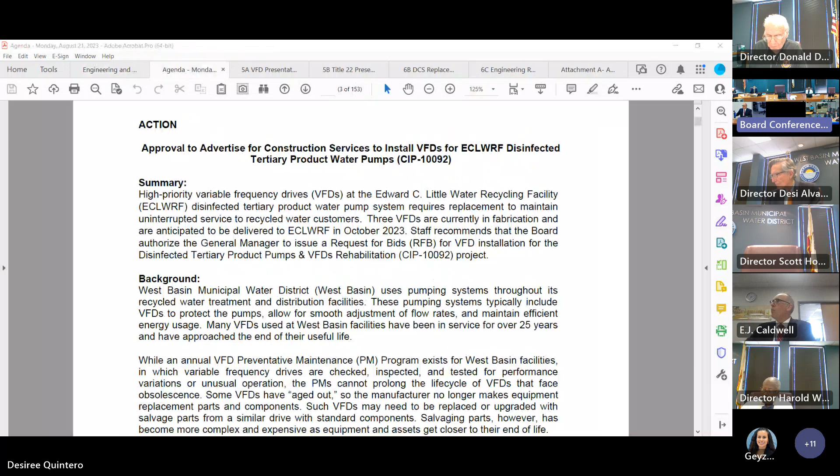Thank you, EJ. Good afternoon, Chairman and members of the board. If you could please turn to page 6 of your agenda packet, and we'll start with a project overview on the VFD and water pump replacement project. I'm on slide number 7.

First, a little background on the variable frequency drives, VFDs, as we call them. They are controlled by changing the speed of the pump or the motor, so that you can have best efficiency in running the system. It allows for fine tuning of the speed control, protecting equipment, and reduced power consumption. It provides efficiency across a series of pumps. We have a total of 120 VFDs and pumps throughout the system.

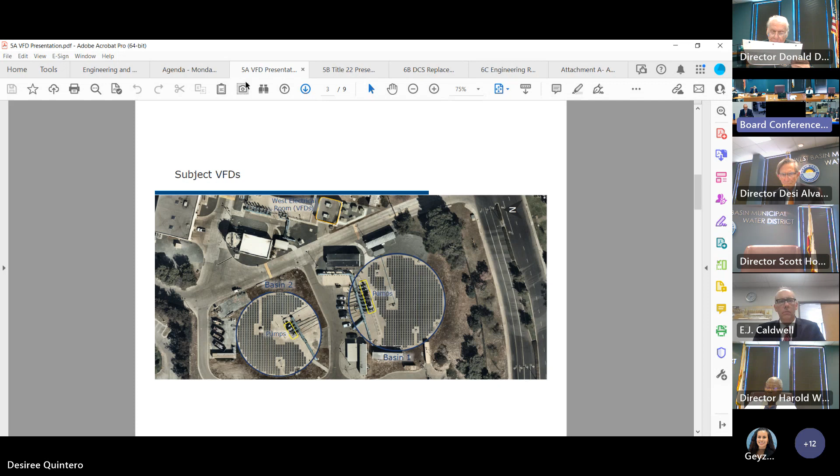We're going to be talking about the product water VFDs for the Title 22. Essentially we have 6 total VFDs. If we move to the next page, on page 8, this will tell you the location of the VFDs we're talking about, and then move to page 9, and we'll give you a little bit of the current state of the VFDs.

This project will eventually replace a total of 6 VFDs. We have about 10 VFDs that are top priority from our operators and operation. Of these VFDs that control the product water pumps, there are 3 that are out of commission, made out of commission because there are no more available parts to service the VFDs.

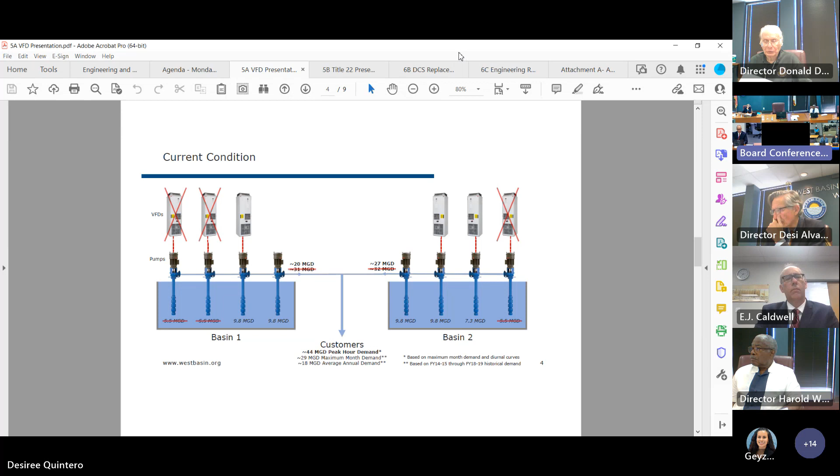We first started this project, and it was brought to your attention in May of 2021. At that time, we awarded a contract to a consultant engineering firm to design the replacement for the VFDs. Then in May of 2022, we procured the VFDs, and they are expected to be delivered shortly in October or late September. Next page, please.

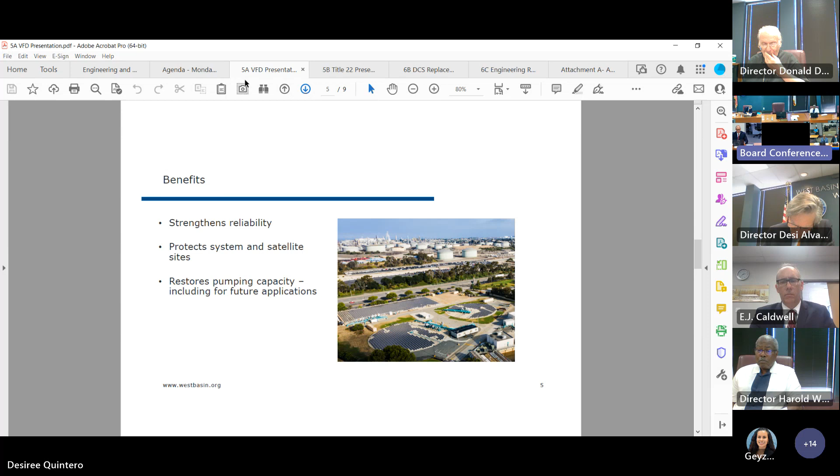The overall benefits of this project are to strengthen reliability, protect the systems and the satellite sites, and to restore pumping capacity to include for future application. Next slide, please. We'll go over the overall schedule.

Last May, we awarded the fabrication. It was expected to take about 42 weeks to fabricate the VFDs. We had a preliminary submittal in August of 2022, and our final shop drawings were February of 2023. We're asking at this particular junction to authorize advertising for the construction contractor to actually install the VFDs, as well as to proceed forward with the construction management firm that would manage the construction on the project.

Again, the expected VFD deliveries are in October of 2023, and we'd like to be able to award the construction service contract in November of 2023, with the project being commissioned early 2024. Question. Yes, you may. Where are these VFDs constructed?

These VFDs were initially constructed in Finland, and then they were finished here in the United States. So partially assembled in Finland, and the remaining assembly was done here in the United States. And the new ones are going to be the same system? Yes, they're all identical.

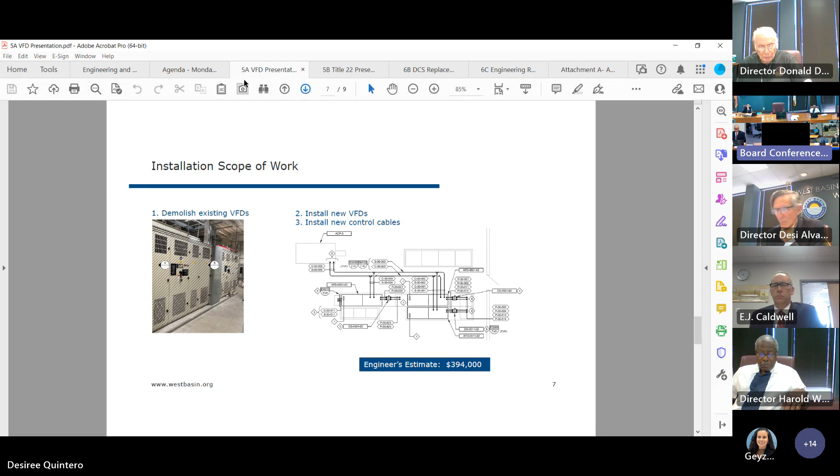A recap of the overall budget for the VFD replacement project. The total contract award for the design consultant was about $225,000. We've spent about 70% of that, or $157,000. The fabrication was done by Wesco for a total price of $590,456.

We've spent about 21% of that to date, or $125,553. The estimated total cost of installation is going to be $394,000, and the estimated construction services for construction management of the project is estimated to be a little south of $150,000.

Okay, at this time I'll take any questions and read the recommendation. Is there any additional questions? I don't have any. Williams, do you have any questions? No. You don't have any additional questions? Has Director Gray joined us?

I have a couple of questions. First one is, what's the estimated construction cost of this item? In other words, we would be putting it out to bid. The estimated construction value is $394,000 for the installation, correct?

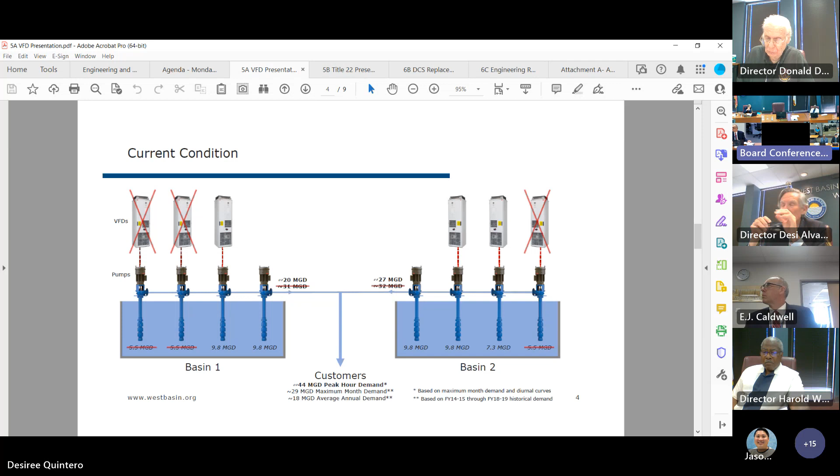On packet page 9, we're showing that the peak hour demand is 44 MGD. Just curious, how often do we encounter that peak hour demand? Maybe I can give it a shot. Director, I'm not sure if we have the number of how many days we encounter that, but it'll probably depend on several factors. Mostly it's the hottest day of the hottest month of the year.

I understand, we don't have an answer for you. Okay, so you don't have an answer. It may be once a year, it may be 10 times a year. It could be once, it could be 10 times. It'd be interesting to know how many times. We'll look into that, yeah, and get that answer for you. Okay.

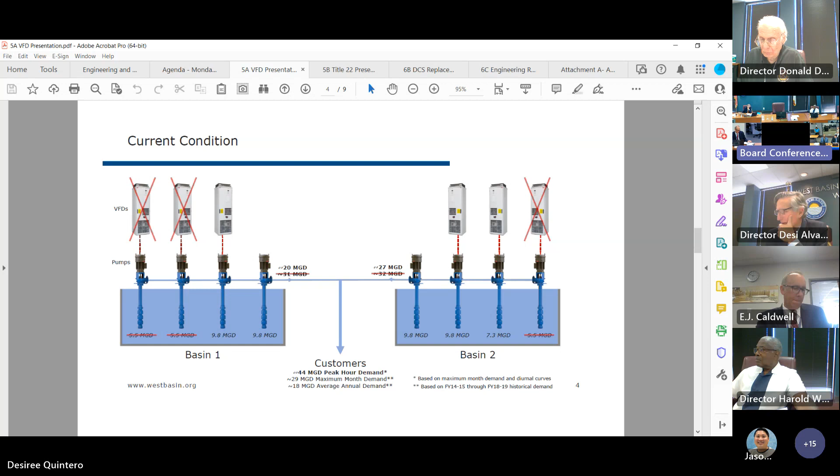At this time I'd like to read the recommendation. Staff recommends that the board authorize the general manager to issue a request for bids for VFD installation for the disinfected tertiary product pumps and VFD rehabilitation project, CIP number 10092. Thank you.

Director Williams, would you like to support that recommendation? I would recommend that it goes forward to the board. We'll move this one forward to the board.

I would like staff to revisit the repair and replacement contract that we just recently awarded, and maybe, if it requires bringing it back to this committee and the board, please do so, expanding some of the items that I think would be, such as this one, that would be realistically part of such a contract.

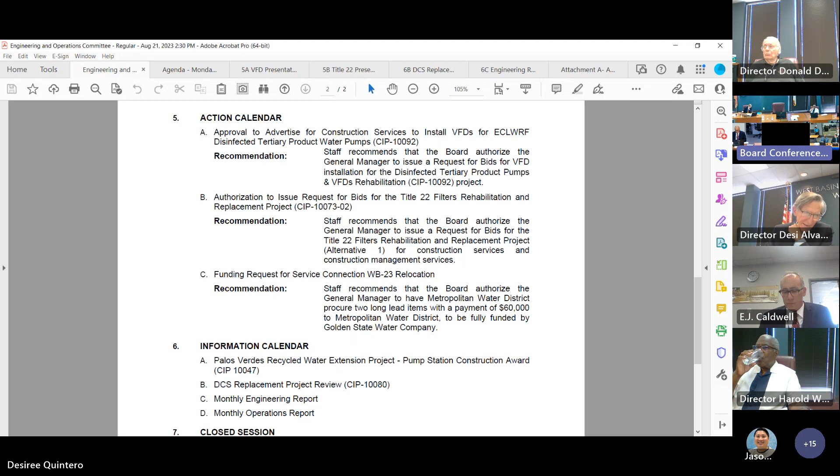Okay, we'll move on to the next item on the action calendar. And that's item 5B, and it's the authorization to issue requests for bids for the Title 22 filter rehab and replacement project. Mr. General Manager, would you like to introduce that item?

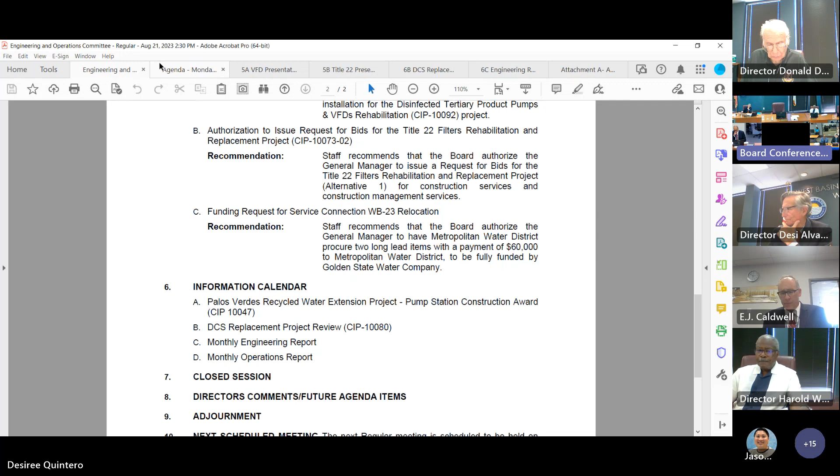Happy to do so. This next item begins on packet page 37. And for this presentation we have Orlando Rodriguez, our senior engineer. Thank you, EJ, and good afternoon Chairman Alvarez and members of the committee. As EJ stated, the staff report is on page 37, but at this time I'd like you to please turn to page 44 of the agenda packet for the presentation itself.

So first, here's the agenda for today's presentation. It's a little bit lengthy, so please bear with me. First we'll start with the process overview at the Edward C. Little facility, followed by the Title 22 filters R&R project itself, some background information and so forth. Following that is a financial analysis of the project. I'm discussing several alternatives that we'd like to present today, as well as some next steps.

Next slide please. One more. Perfect. Here you could see an aerial of the Edward C. Little facility.

Just want to do a quick overview of the Title 22 process itself. So on the northeast corner of the facility, water comes in, secondary effluent comes in from Hyperion via pump station and a force main. That then enters the pretreatment high-rate clarifiers, kind of in the south middle of the facility, and then effluent from there goes into our filters. Just adjacent to that you'll see filters 1 through 10, essentially labeled as train 1, and north of that, crossing the road, is the converted filters, train 2, which are filters 11 through 14. Effluent from the filters going to our chlorine contact basin, and then followed by the product water tanks, which then get pumped into our distribution system, sent to our satellite plants at source water, along with our irrigation customers.

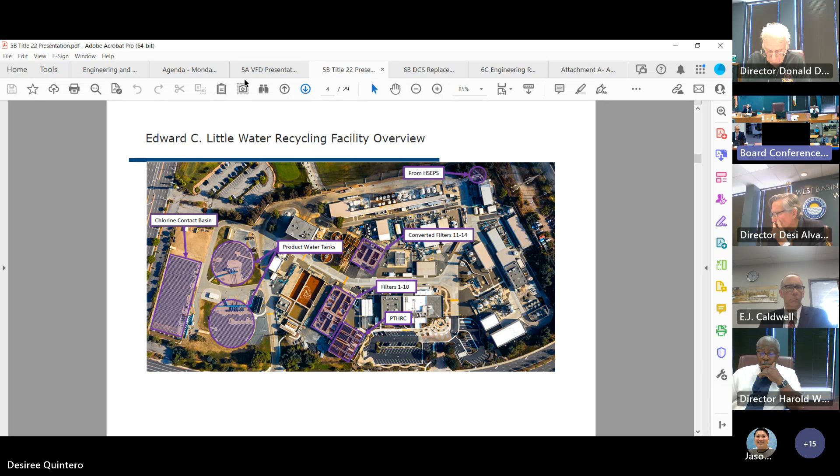Just some background on the filters themselves. In 1995, as part of the phase 1 construction of the Edward C. Little facility, filters 1 through 6 were constructed for the purpose of producing disinfected tertiary water, also known as Title 22 water, along with filters 11 through 14, which at the time served as pre-treatment for the production of advanced treated water for the West Coast barrier.

Then in 1997, as part of the phase 2 expansion, filters 7 through 10 were constructed and basically added on to the existing filter structure of filters 1 through 6 for additional disinfected treatment capacity. And then in 2007, as part of the phase 4 expansion, filters 11 through 14 were converted for even more treatment capacity for the production of disinfected tertiary water. Next slide.

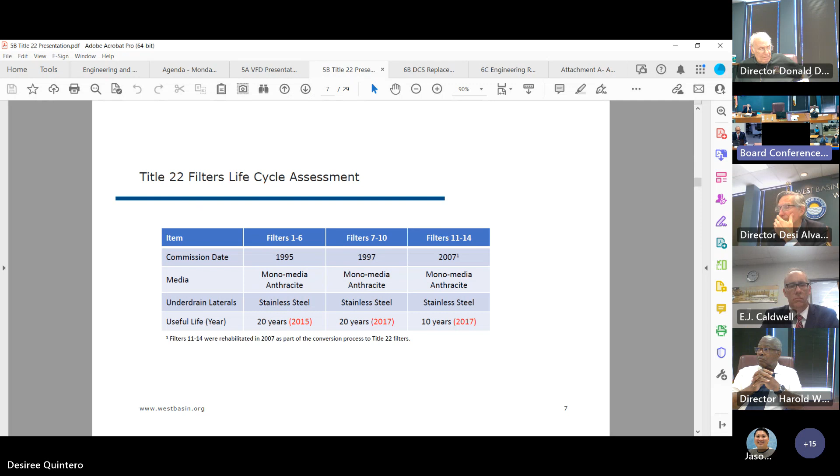So one thing I want to highlight here is a key component of the filters themselves are the underdrain laterals that help optimize performance while providing uniform distribution during the backwash cycle of the filters. These laterals typically have a useful life of 20 years.

So if you see at the bottom of that table there, I have some information in red essentially showing the end of the useful life, for instance, for filters 1 through 6, that would have been in 2015, filters 7 through 10 in 2017, as well as filters 11 through 14, 2017. So these underdrains have been operating beyond their end of useful life for about 6 to 8 years.

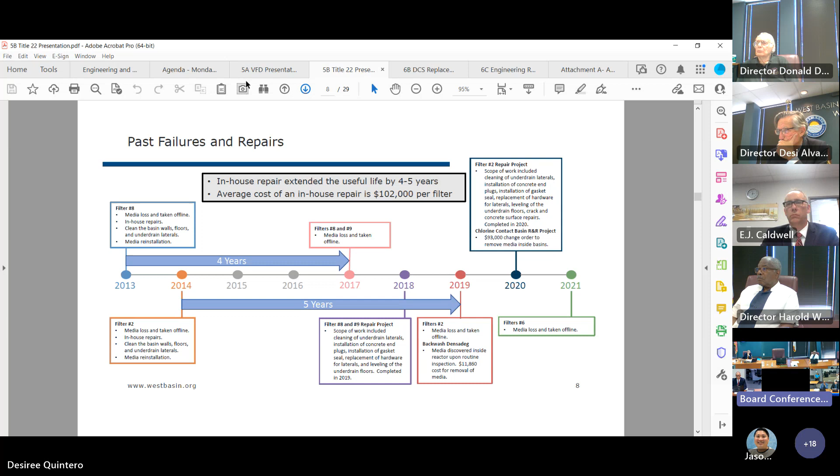So in the end, these kind of spot repairs that we performed, as you could see, only really extended the useful life of the filters for about 4 to 5 years until they failed again. And the average cost to bring those filters back online was about $102,000. Next slide, please.

So due to the repeated failures of filters 2, 8, and 9, it was decided to undertake a more comprehensive R&R for the remaining 11 filters themselves. In 2020, an RFP for design services was initiated, and after a thorough evaluation process, the project was awarded to Carollo Engineers. The scope of services included an evaluation of R&R alternatives, drawings, specifications, and at the end, a construction bid package that we could put out for the installation of new elements, filters, and so forth.

During the design phase, 4 technical memorandums were completed, and a recommended scope of work was developed to replace the under-drain laterals, perform concrete repairs, and construct necessary safety improvements. The construction bid package was completed in June of last year, 2022. Next slide, please.

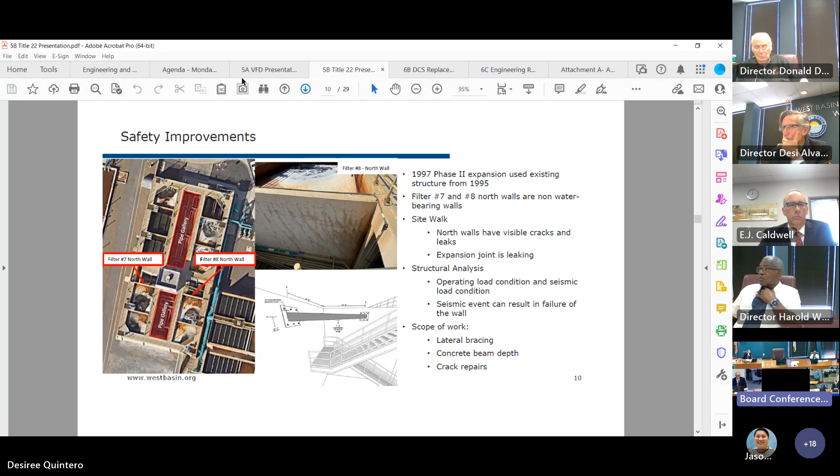Carollo performed the structural analysis, technical memorandum number 2, which indicates that a seismic event can result in a failure of that wall. As part of the project, staff still recommends to move forward with the safety improvements in the form of structural lateral bracing, crack repairs, and added concrete beam depth that will increase the load capacity of those walls. Next slide, please.

And I do want to go over the crack repairs because that was initially asked for staff to move forward with. So as a result of the structural analysis, staff was authorized to issue a request for bids for the safety improvements in late 2022. Bids were due on January 18 of this year, and one bid was received for $150,000 to perform all the safety improvements. Staff presented that to the committee, but it was voted at the time to not proceed and implement the crack repairs only.

We tried to negotiate with the one contractor, the one bid that we received, to just perform the crack repairs, but unfortunately they declined to move forward with just that scope of work. So we then proceeded with trying to find some local contractors that specialize in crack repairs and concrete work.

At the time, there was no interest from some of the local contractors that we reached out to. So we then decided to go out to solicitation again and issue a request for bids for the crack repairs only. That was initiated in June of this year. Bids were due in July, last month, and unfortunately we did not receive any bids for the crack repairs only.

We reached out to local contractors again to see if anybody was interested. We received one contractor that was interested, and we performed a site visit with them on August 12th, last week, and we received a bid for $84,000 for the crack repairs only. So I do want to point out that the larger overall project does have the crack repair safety improvements included in it, but we do have options if we want to just perform the crack repairs only and move forward with that. Question? Yes, you may.

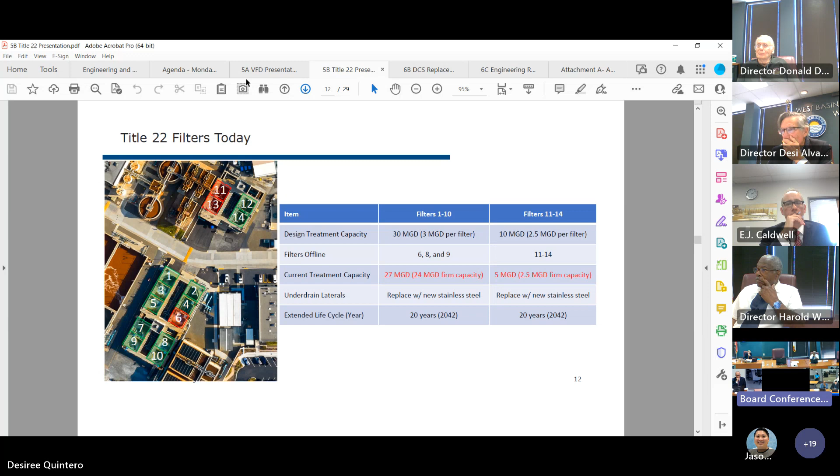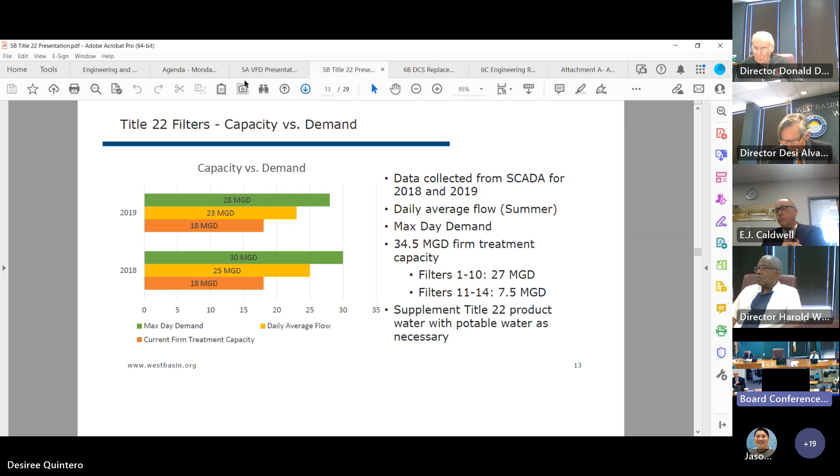So as part of a data gathering exercise, data was collected from SCADA for 2018 and 2019. The highest daily average flow was 25 MGD in 2018 and 23 MGD in 2019. Also, the max day demand was 30 MGD in 2018 and 28 MGD in 2019. So as you can see, with our current firm treatment capacity, we are not able to meet the demands using Title 22 water as a source water. What that means is that we have to supplement, and we supplement with potable water when that happens. Next slide, please. One more.

Perfect. As previously mentioned, the Title 22 water is the source water for the satellite plants. Title 22 water enters the satellite plants and is refined further to produce either nitrified or boiler feed water for the particular refinery. Typically when the product water demand is greater than the Title 22 source water coming in, potable water supplement is used as makeup water to meet these demands. But unfortunately, this comes at a high cost to West Basin because we're essentially paying the rate of the local purveyor when we supplement with potable water.

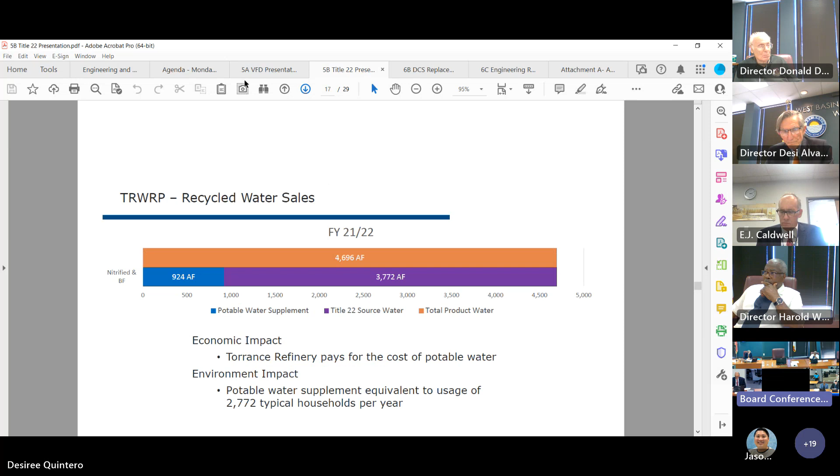And this is Torrance, but there's a unique situation here where the refinery pays for the potable water supplement when needed, as they own the potable water meters. So although there might not be an economic impact to West Basin, there's still an environmental one. That results in about 2,772 typical households per year. Next slide, please.

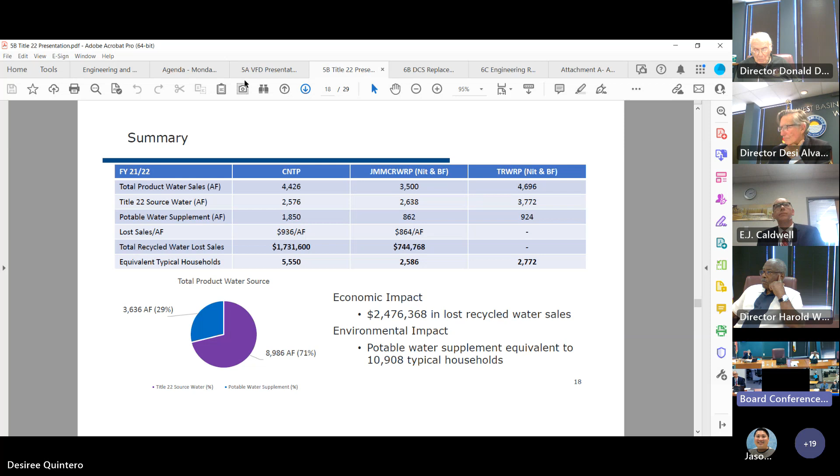So in summary, the potable water supplement accounted for almost 1/3 of the product water source used to produce either nitrified or boiler feed water. This resulted in a total of about $2.4 million in lost recycled water sales, along with the equivalent of almost 11,000 typical household usage for fiscal year 21-22. Next slide, please.

So for consideration purposes, staff is proposing 3 alternatives to move forward with this project. Alternative 1 would perform a comprehensive R&R on the 11 remaining filters with no prior repairs. We already did some repairs on filters 2, 8, and 9. As previously shown, the filters are beginning to fail, and this alternative will limit the probability of any major future repairs while increasing reliability and customer service by avoiding increased service interruptions.

Alternative 2 would perform a comprehensive R&R on just the 3 offline filters, 6, 11, and 13, and take a wait and see approach by performing spot repairs or an R&R on a filter once it fails. So just doing the R&R on 3, and then the rest, the 8 remaining filters, rehabbing them as they fail. That alternative takes a more reactive approach, as it presents a higher risk of potential customer interruptions and compliance due to the likely failure of those 8 remaining filters.

And last but not least, alternative 3 would allow for an R&R for up to 2 filters a year. We would program the project each year, and therefore it would take approximately 6 years to complete the 11 remaining filters.

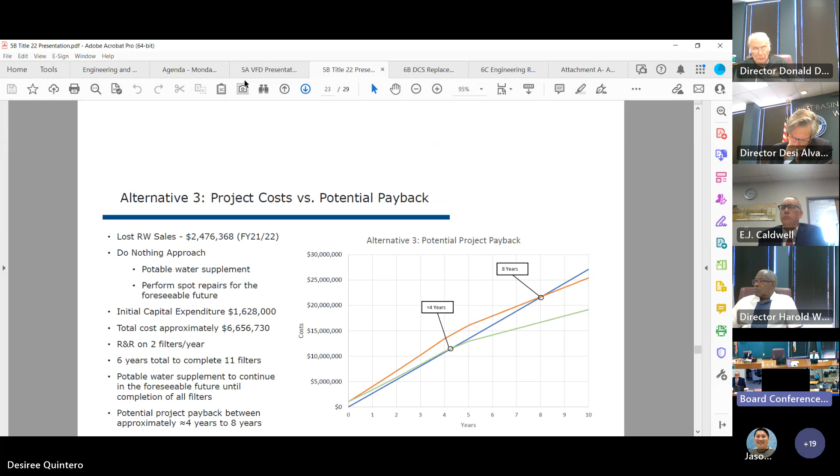And similar to alternative 2, we believe that with alternative 3 we're likely not going to be able to achieve a 75% reduction, more in line with 25 to 50%. So in this case, for alternative 3, we can expect a return on investment on the total cost of this alternative somewhere between 4.

So here, going over each alternative and some of the key factors, and based on the information presented before, staff is recommending that we implement alternative one. As previously stated, it has the lowest total cost overall of the project, increases the reliability of all filters at once, decreases future customer interruptions, and limits the possibility of any future repairs on the filters themselves moving forward. Next slide, please.

So here are next steps and a preliminary project schedule. Obviously, we are meeting today to get authorization for action to request bids. Solicitation would begin next month, in September of 2023. And hopefully we would award the project in November of this year, 2023. The estimated construction timeline is about 12 months, so that would put us into November of next year, 2024, for completion.

Next slide, please. So here is a recap of the estimated project expenditures if we were to move forward with alternative one. In terms of previously planned project expenditures, we previously anticipated about 5.2 million in last fiscal year and just over $2,000 in this fiscal year, but things have changed. So right now, we have revised capital expenditures and are currently anticipating a spend of about $4.2 million for this fiscal year and almost $800,000 for next fiscal year.

Partial external funding in the amount of $468,000 has been secured through fixed payments from our refineries. The difference, about 4.6 million, would have to come from our pay-go and funds from our reserves to complete the total spend for the project.

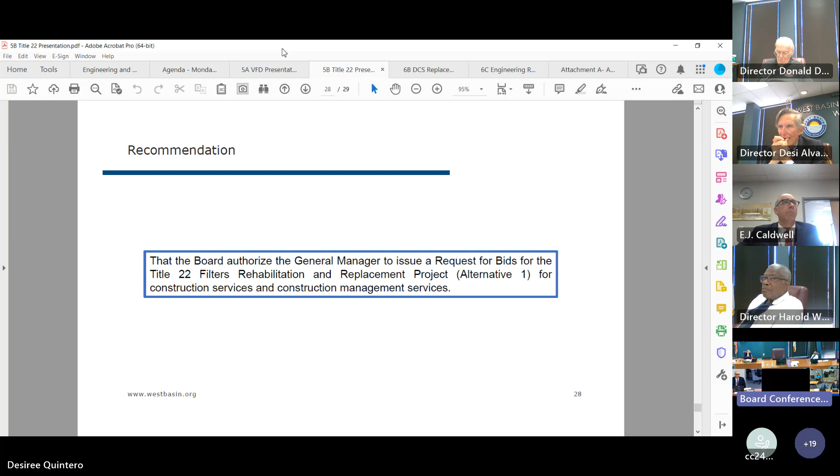We continue to handle and staff as many of our outreach efforts, those where we go out and actually meet with contractors to talk about how to do business with West Basin. So I want you all to know that we're aware of the concern, and we're doing everything we can to make sure that we not just appropriately market our opportunities, but also bring in diverse bidders and responders. That's it, I just wanted to address that.

Thank you, and I do think that there is more outreach now, since that's become a question that's come up multiple times in the board, and how do we better reach out. There is a concerted effort to do that, and I very much appreciate the work that staff is doing in that direction.

So that we're not here all afternoon—why not? Well, what's on the floor right now is going to the next step, which is to go out to bid. That's correct. So what I would recommend is that we send this to the board without a recommendation, and we have this discussion when all of the board members are available. That way, we can put it to rest quickly.

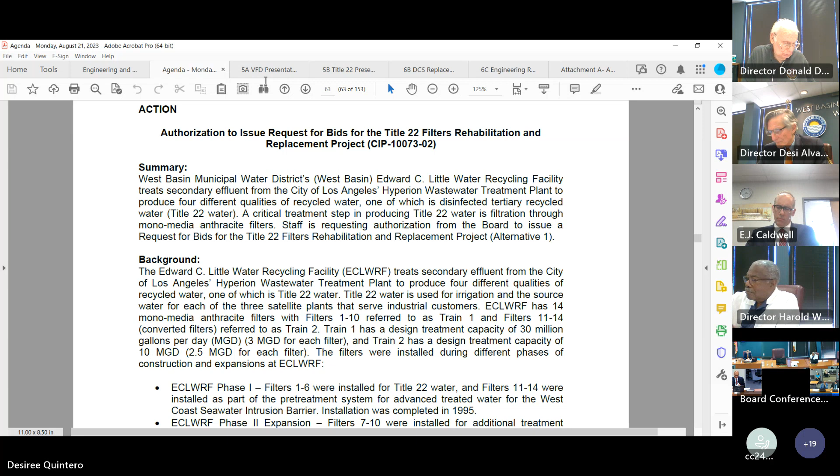I came up with 5.62 million. Mhm. Yeah.

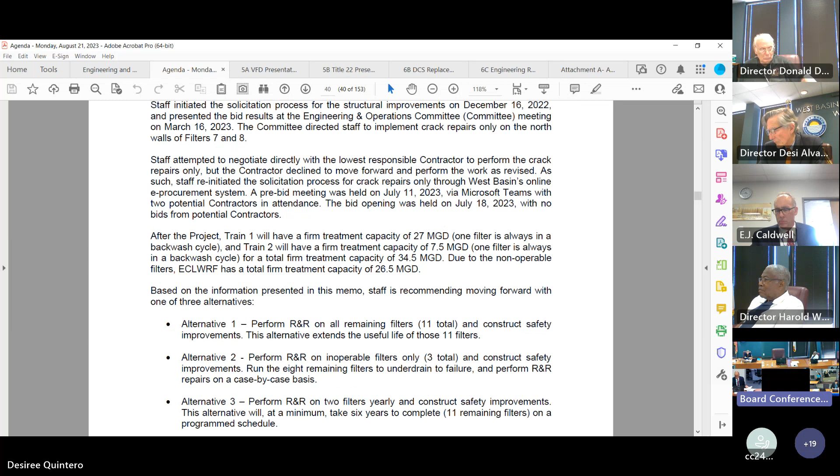On alternative 1, it says that performing R&R on all remaining filters and constructing safety improvements—this alternative extends the useful life of those 11 filters.

Doesn't tell me how long that useful life is being extended. And you may not have the answer now, but that would be an interesting answer to have. What is the useful life extension of performing R&R?

Is it extending it for another 5 years, 20 years, another 6 months, etc.? So maybe you can come back.

You don't need to answer it now, but if this is going to move forward, you'll have that—that is a question, or maybe you can expand on the staff report and address it there.

Alvarez, it's on packet page 50 on the slide. It's 20 years. If I look at that, the 20 years, I'm saying, is R&R really going to extend this that much?

Anyways, I just think I would like a fuller discussion of that. I'm just letting you know what my questions are.

When I look at alternative 2, and you have a small description there that performing R&R on the inoperable filters, 3 total, and constructing safety improvements.

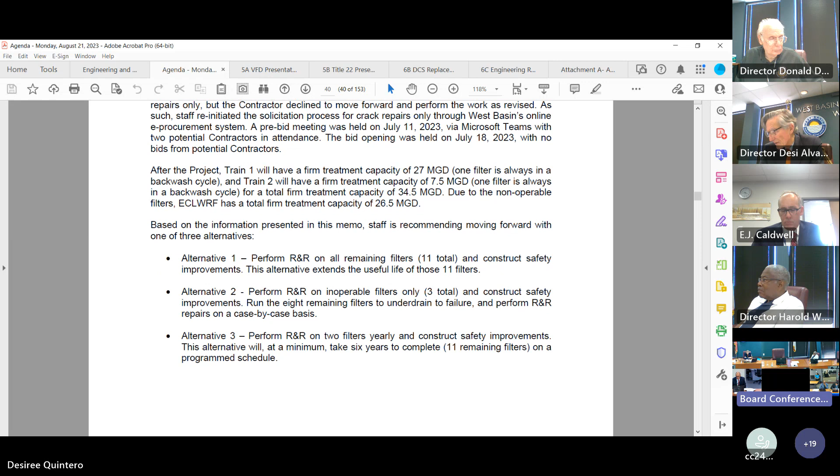Run the 8 remaining filters to failure and perform R&R repairs on a case-by-case basis. That does seem kind of draconian, but when you say run them to failure, do you know what that means?

Well, how long does it take to run something to failure? And what do we mean by failure?

So, should we answer it? Yes, you can.

So essentially it's a failure, meaning in cases we've seen before, like media loss, the underdrains themselves, the laterals have failed, thus media is escaping, and therefore we have to take the filter offline. It's not just an underdrain failure, we consider that filter to be offline and have to do extensive work, like an R&R, to bring it back online. Failure in that case doesn't mean these things are burned out. Failure means the breakthrough is such that you need to take them offline and repair them.

I read failure, I go, what do they mean by failure? Run failure means it's a reactive approach. It fails, then we make the fix, versus doing it proactively, which is not a run to failure.

And then you talk about alternative 3, which is kind of a hybrid approach where you perform R&R, get everything pretty much copacetic right now, and then instead of repairing them all, you repair them on a sequential basis, taking 2 of the filters out of service every year and repairing or rebuilding them, doing that for multiple years. In any one year, it's about 1.5 to 1.6 million per the other table, which in the aggregate will be more, but it'll be spread out over 6 years.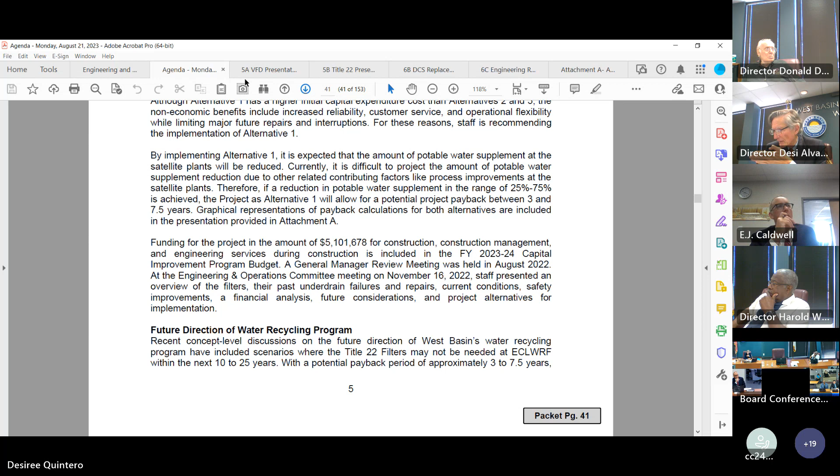So essentially, if we go to packet page for alternative one on page 64, what we show is a do-nothing approach, meaning we just maintain our status quo. We're going to supplement potable water at our satellite plants and maintain that for the foreseeable future. That's the blue line there. That's based off of, if we do this project being alternative one, although we won't eliminate the use of potable water supplement, it's hard to tell exactly what reduction we will achieve. So we show a range of possibilities, including if we reduce 25% in potable water versus 75%, with 75% being the best case scenario. If we're able to achieve that, we're looking at about 3 years return on our investment, and 7.5 years for the 25% case.

I do read these reports, so sometimes when I read them, I'm going, I don't understand that. In the case here, it would be nice to have seen that described better in the report, and even included in the report a reference to that one graph, because 3.5 or 3 to 7.5 is 3 for alternative one, or whichever alternative, 5 for the other alternative, 7.5 for the preferred alternative. But when you read the staff report, it's hard to understand that.

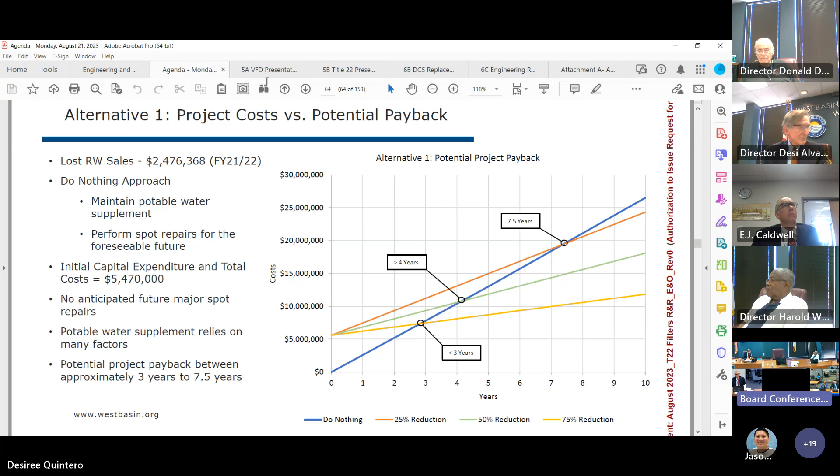But I don't believe that this committee is going to make a decision on this. And Director Williams has already asked that this be moved forward to the board without a committee recommendation. So such will be the case. All right. We can move on. The next item up on the action calendar is the funding request for Service Connection WB 23 relocation.

So, Mr. General Manager. Yes, Mr. Chairman. Mr. Chair, and Director Gray, I just want to say regarding the last item, before you move on, I think it's been a great discussion. I've heard your comment and Director Williams', and I do think the board, all of us, need to weigh in on that decision. So I just want to make that comment. Thank you. Thank you, and I apologize, Director Gray. I should have asked for other directors' comments. Oh, that's okay. Thank you very much.

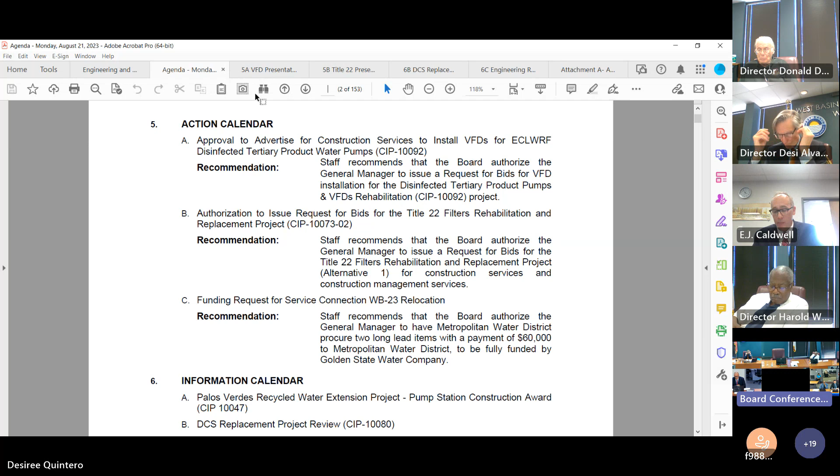Yes, Mr. Chairman, I did want to apologize. Item 5C, as you just mentioned, is related to the funding request for Service Connection WB 23 relocation. This presentation will be provided by Orlando Rodriguez again, but I do want to point out that in an earlier draft of the agenda, this item was not included. We've had our engineering team working on this with Golden State Water Company as well as Metropolitan Water District over the past week and a half, and we were able to get everything done in time. So with that, I'll hand it over to Orlando.

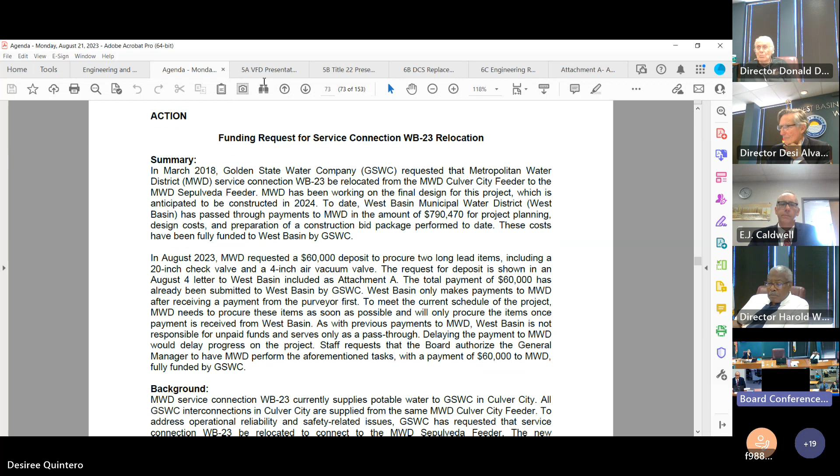Thank you, EJ. Please turn to page 73 of the agenda packet for a copy of the staff report. A little bit of history on this project: back in 2018, Golden State Water Company requested that MWD relocate Service Connection WB 23. Currently, it's on the Culver City feeder in the city of Culver City, and they requested that it be relocated to the Sepulveda feeder. Per their procedures, MWD performs all items related to the project: the study phase, preliminary and final design, procurement, construction, startup, and lastly, the project closeout.

In these scenarios, West Basin acts as the intermediary between both parties for items like invoicing and payment. For example, MWD invoices West Basin for the project-related costs, and in return, West Basin invoices Golden State Water. To date, West Basin has passed through payments to MWD from Golden State of about $790,000. MWD is currently finalizing the construction bid package with the intention to go out to solicitation in November this year. This month, MWD requested $60,000 from West Basin for 2 long lead items, a check valve and an air vacuum valve.

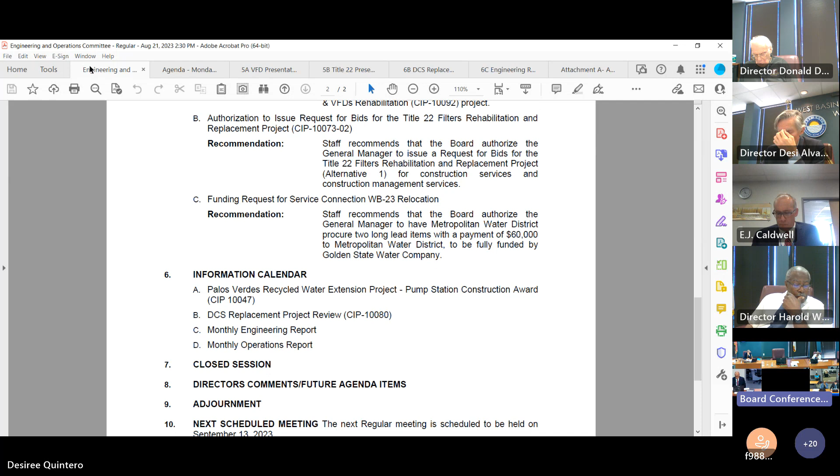The reason for the request is that these have about a 24-week lead time. So in order not to disrupt the current project schedule, they're requesting payment now of $60,000 to procure the items and have them ready when construction begins. West Basin has received the funds from Golden State and is ready to issue payment to MWD. So at this time, I'd like to read the recommendation: staff recommends that the board authorize the general manager to have Metropolitan Water District procure 2 long lead items with a payment of $60,000 to Metropolitan Water District, to be fully funded by Golden State Water Company. I'd be happy to answer any questions.

Thank you. Director Williams, any questions? Nope. Director Dear? No. Director Gray? Okay. This is basically a pass-through item. We're going to fund the $60,000 upfront. We already received the funds. Yeah.

So, but there's gonna be additional monies that Met's gonna spend and ask for reimbursement. Yes. So at some point, Met's going to request money for solicitation, construction, and so forth. I'm gonna make an alternate recommendation. Given that this is gonna be 100% reimbursed by Golden State, and you're gonna be bringing this back multiple times. I think we've seen this once before.

And so every time there's a request for reimbursement from Met, and they will probably come back through, as you just said, several more times, pretty much all we're doing is authorizing the expenditure of the monies that we're getting reimbursed for. So I would suggest that when this item moves forward to the board, I believe it will be moved forward to the board, and we bring it back to the board, authorizing the general manager to go ahead and

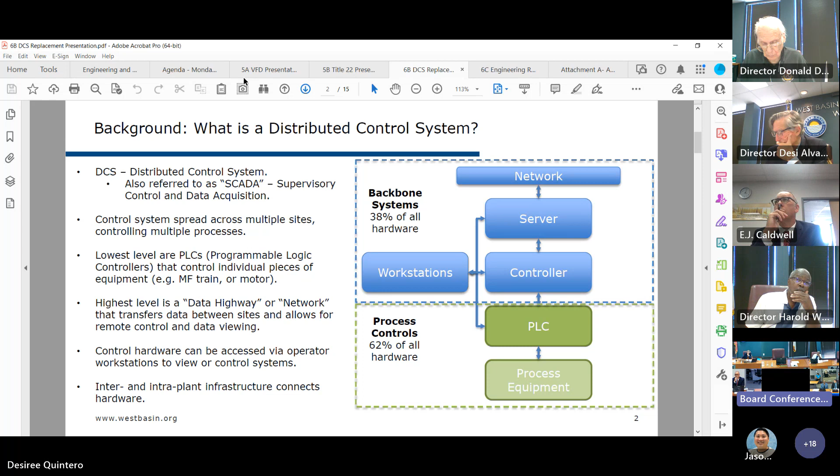So approximately 2/5 of all of our hardware in the DCS is what we consider backbone equipment, while the remaining 3/5 are the process controls. Next slide, please.

Further investigation by staff found that over 30% of the hardware deemed obsolete has the potential to cause a full recycled water production shutdown of either ECL or one of the satellite plants. So most of these components are in the backbone. This obsolescence is further compounded by other issues.

So here at West Basin, we have limited institutional knowledge on how our DCS is set up and operated. We're running extremely outdated software across our entire system. Most of it is no longer supported by the manufacturer. So that means we have no service updates, no cybersecurity patches, and no technical support. And we haven't had that for many years. This presents a significant security risk, as our system is currently vulnerable to cyber attacks similar to those that have occurred in water districts across the country in recent years.

In terms of O&M expenditure, we currently have to send operators out to remote facilities such as pump and disinfection stations on a daily basis to monitor their operation and check for alarms, as we currently don't have communication through the DCS with those remote facilities. And finally, we've historically seen communications to our satellite facilities dropping out on occasion due to the age of the fiber lines we have installed between the plants that are around 20 years old. So this often results in a contract operator needed to staff the plants 24/7 for extended periods as the remote monitoring that I mentioned before becomes unavailable.

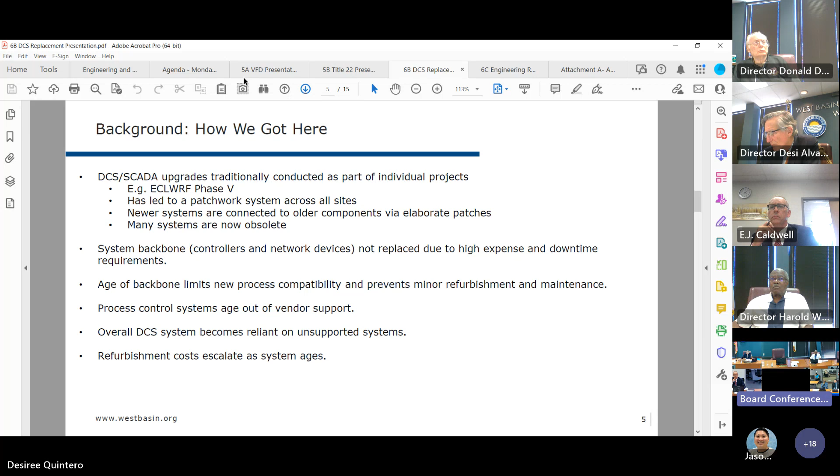In addition, as mentioned, our control systems are mostly now no longer vendor supported due to their age. So this presents significant risks as we move forward with the DCS system, where third-party contractors are, in some cases, refusing to work on that system due to its age. Reliability. Next slide, please.

So project costs and expenditure. To date, we've spent $706,337. $475,000 of that was spent on the audit, which produced three reports where we detailed the obsolescence of our current system and potential next steps.

The recommended path of those reports comprises a potential expenditure of up to $22 million across 10 years to refurbish the entire DCS. This includes everything from network and fiber infrastructure right at the top, all the way down to local process controls. Obviously, this refurbishment is highly dependent on many things, not least of which is the future direction we decide to choose for the district, as that will heavily influence which sections of our system we want to refurbish.

We have secured just over $800,000 in refinery funding to date, although the old agreements were based on total project budgets for this project far below the proposed $22 million. For this fiscal year, we had originally intended to simply implement some stopgap measures while the future direction of the district was established and we could reassess the overall refurbishment.

However, in recent months, we believe we've devised a plan that could eliminate most of our current issues at far lower cost. So Emerson Electric, I mentioned briefly before, they're the manufacturer of our proprietary controllers that we use across all of our sites. They recently approached us with a proposal to replace the entirety of our backbone system from network devices all the way down to those controllers.

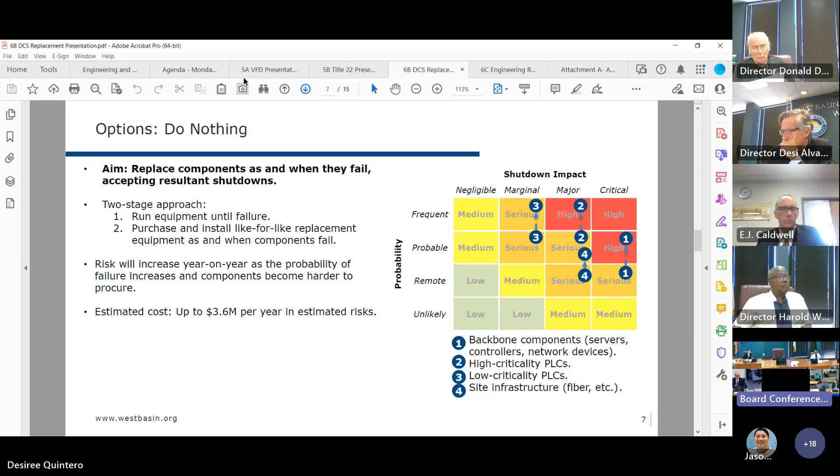As you can see, over time, the failure rate for all component systems would increase slowly and steadily. We're already seeing escalation of DCS failures, and this will only continue as the system ages and replacements become more difficult to find. So our estimated risk total is approximately $3.6 million per year due to the probability of failure, the cost of replacing parts, and the cost of potential shutdowns.

Next slide. So this second option is what we were originally considering for this year, and this is what the proposed 23-24 budget contains the money for, $1.2 million for this stopgap measure. This was based on uncertainty at the time around the district's direction and the high anticipated costs of the overall refurbishment. The aim was to procure standby replacement components for a few key PLCs that would mitigate the length of any potential shutdowns. These would be like-for-like replacements, as close to plug and play as you can get.

However, it's important to note that these would still be obsolete components, so we'd simply be pushing the issue down the road. This approach has the potential to reduce the shutdown impact for PLC failures. However, it would not mitigate any risks associated with infrastructure or the backbone, as you can't have plug-and-play systems into the backbone, you have to replace it as a whole.

This temporary fix would reduce the estimated risk by half, and likely only cost $1.2 million. So it generates an estimated return on investment in less than a year. That's why this option was originally proposed for this year, and the current proposed budget for this fiscal year is $1.2 million to correspond to this option. However, as mentioned, this is only a temporary solution, and so staff have been continuing to evaluate other options that provide more permanent results.

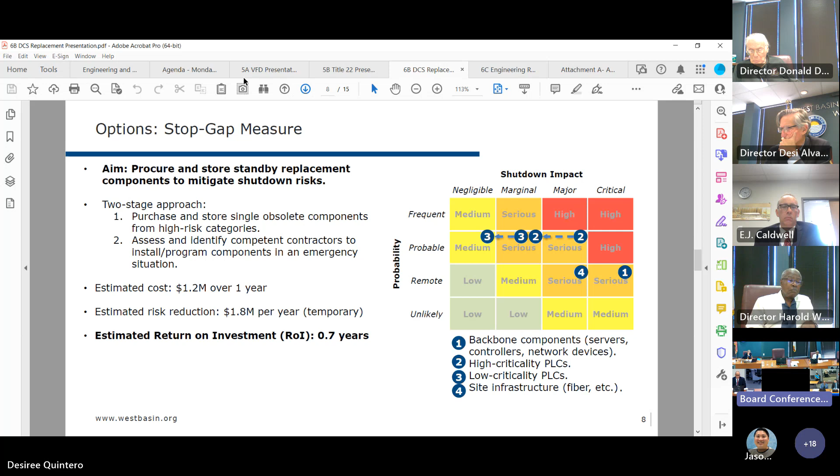This refurbishment would give the district a fully supported backbone system with modern software, full technical support, and most importantly, a robust cybersecurity system to prevent and mitigate the threat of cyber terrorism. The aim will be to refurbish the backbone over the next 2 years, beginning with the Torrance site, and the total estimated cost is $4.3 million over those 2 years, including contingency and West Basin labor. We also expect the costs for the Torrance and Chevron nitrification plant to be fully reimbursed by the respective refineries, which would reduce our estimated West Basin expenditure to approximately $3.5 million.

So this would reduce the risk. The estimate is to reduce the risk by 50%, and so reduce the risk by $1.8 million per year. A cost of 4.3 gives a return on investment of 2.4 years. Next slide, please.

These next 2 slides detail the next 2 stages in this overall refurbishment. In the interest of time, I can skip past them. But effectively, the next step would be to replace the infrastructure, all our plants, and the fibre between the plants. The return on investment there is pretty considerably long, so we're not recommending proceeding with this option at the moment. And then the next slide.

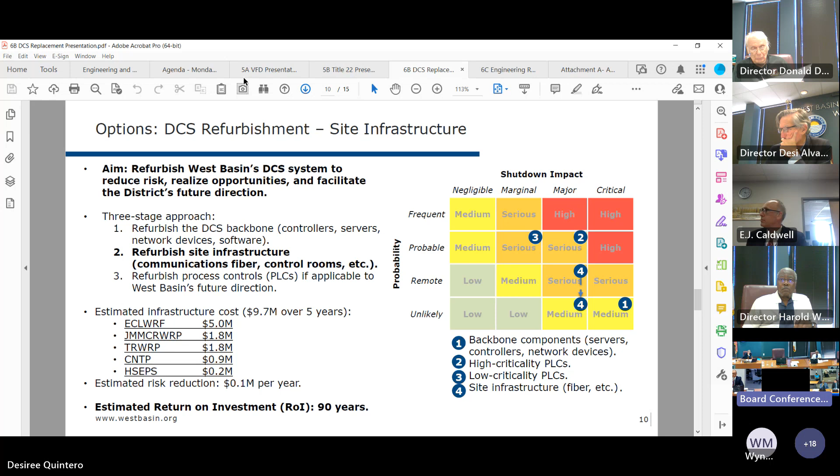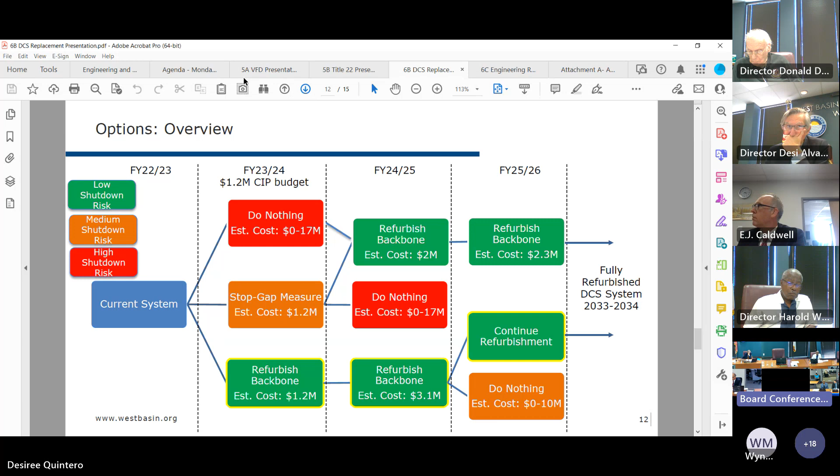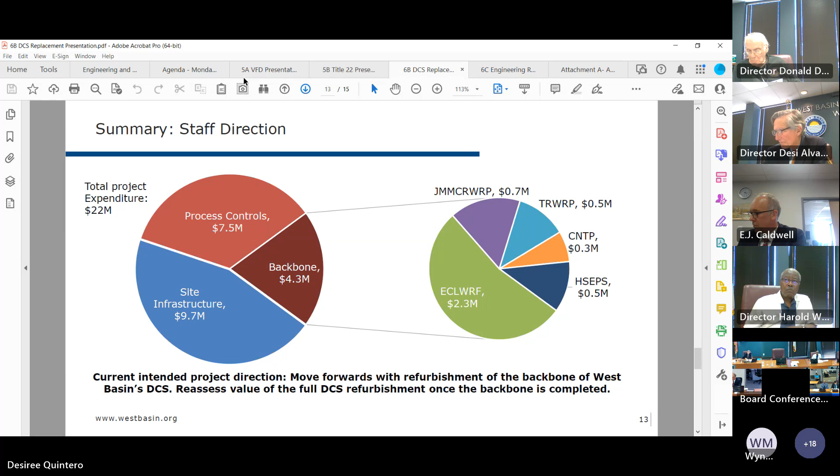So that brings me to our final slide, the next steps. We're currently negotiating the cost and schedule of the backbone refurbishment with Emerson. As this will likely be a sole source procurement due to the proprietary nature of the system, we're going to confer with our district counsel to establish the requirements are met.

We then intend to return to this committee with a recommended award for consideration in the next couple of months. Meanwhile, staff will be looking to develop updated drawings of our current DCS to minimize the potential risk when construction occurs. And we're also planning necessary shutdowns that will be required later on when we upgrade or refurbish this backbone, assessing any other projects or maintenance that we may wish to perform during those planned outages.

If approved, the refurbishment will begin at the Torrance site, as site assets there cannot be transferred until the site DCS is refurbished. The refurbishment will then proceed through the satellite plants before taking on the largest task of ECL. Our current aim is to refurbish the backbone of the district DCS within the next 2 years to both significantly mitigate risks and enable the current operation and maintenance of our recycled water production.

So with that, the presentation's over, and I'm happy to answer any questions. Thank you.

Director Williams, do you have questions? Not now, thank you. Director Dear? Director Gray, do you have any questions? Okay, this item is for information, right?

So there is no ask, but if I heard you correctly, there is a recommendation that you would like to move forward with. There will be in future months. We're intending to come back. We're currently negotiating with Emerson to get a final quote. Once we have that and we've established that the sole source solution is viable, we then come back with, if we agree with the award, we come back and recommend.

So you would be coming back with a recommendation to approve a sole source contract that you negotiated with Emerson on the basis of just retrofitting the backbone system. Yes. So it is a recommendation that you're pursuing, and because it's going to come back, and we've negotiated a contract with Emerson for sole source, assuming that the general counsel finds a way to justify the sole source procurement, which I'm sure he will, and then ask that we approve it.

You described a couple of other options, several of which were more expensive and more work being done. Is the rebuilding of the backbone system sufficient to basically address all of the issues associated with it? It would mitigate most of them. Roughly, the estimate is currently 50% of those risks, but the most important ones being cybersecurity and the risk of electric shutdown. So it would mitigate the risks of things that we're seeing at JMM currently, and it would mitigate cybersecurity risks.

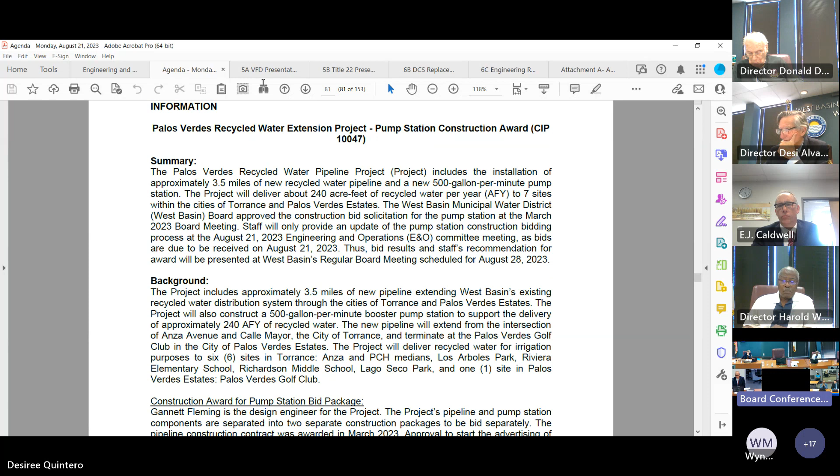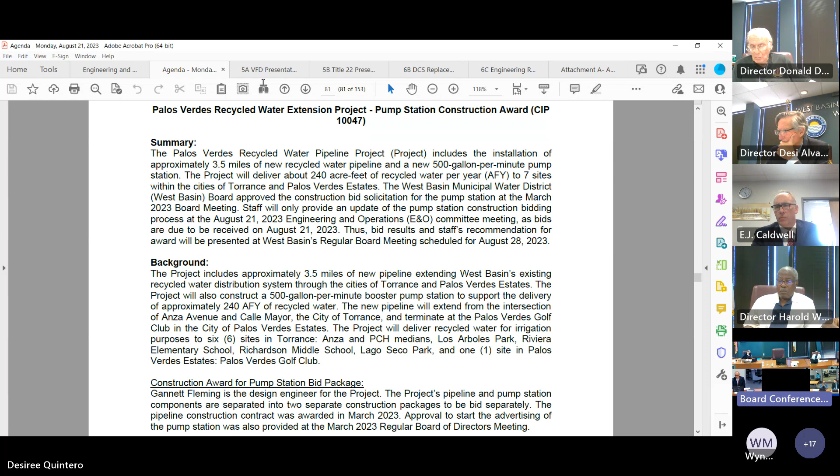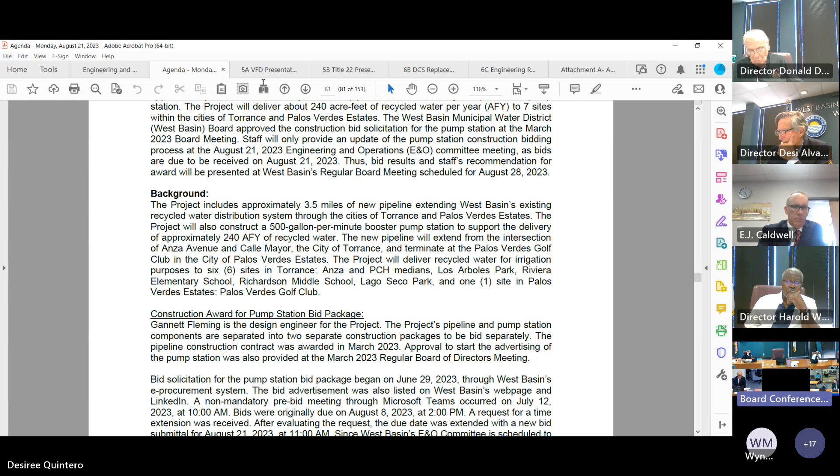I'll be super brief. This board item 6A on page 81 is only for the pump station. It was intended to be an information item that will be transferred into an action item at the board meeting. To give a quick summary of the procurement for the bid solicitation on the package: the construction bid package went out for bid on June 29th of this year. We used our e-procurement system, the Mersal system, which had 1,600 hits regarding this bid being distributed. This was also advertised on our webpage and LinkedIn. There was a non-mandatory meeting on July 12, 2023, attended by 8 potential bidders or companies.

Bids were originally due on August 8th of this year, and we got a request for a time extension, which was extended through today. Today we received bids at 11 a.m., and we only got one bid, which is near double the original cost estimate submitted by the engineering design firm. That bidder was Canyon Springs Enterprise—we're still in the process of reviewing information. However, their bid result came out as $3,632,700. How much? $3,632,700. So staff is recommending to reject this bid and restart the bidding process.

That's basically my whole memo. Okay, so that's it, you're done? That would be a recommendation, Veronica—reject the bids and basically rebid to start the process again.

So the initial intention, like Veronica said, was to turn this info item with the bids received today into a recommendation next Monday to award. But given what the results came in, I'll reiterate that our recommendation is to go out and bid again. Our procurement staff reached out to some of the contractors who were interested in the project and participated in the procurement to try to get feedback. There are some shared reasons, but we want to do a little more homework before we report out on that.

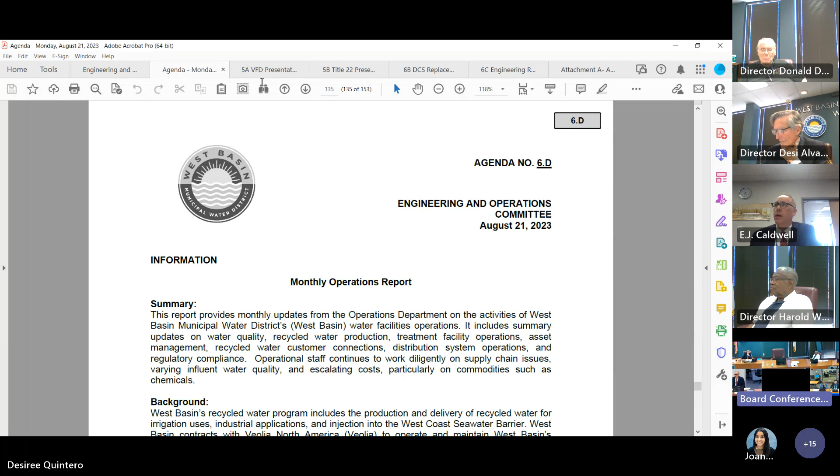Yes, thank you very much Mr. Chairman. For this presentation we have Uzi Daniel, our manager of operations. But before she begins, I wanted to make a brief comment: watching our operations team as well as our engineering team sometimes is extremely impressive, and the work they do day in and day out is above and beyond what my expectations are, so I wanted to point that out.

Over the past couple of weeks, we've had an air vac that was run over in the city of El Segundo, and a significant power outage to our pump station at Hyperion. I really got to see for myself the level of dedication, the late hours, staff out on the street at 9:30 p.m., and it's just been impressive. We didn't just make it through those two emergencies; this past weekend we also had what was Hurricane Hilary turned into a tropical storm.

And I just want to point out that throughout the weekend, getting emails day in and day out with regularity about what was going on at our facilities and that we were safe and still delivering recycled water was very impressive. And I know we have Linda here. So I want to say thank you to you as well as your team, but then also Barkev and Uzi as well, because I was able to kind of breathe a sigh of relief.

We talked a little bit about the facility earlier as one of the action items, but we did have a pretty significant earthquake. And when that happened, I ran to my phone to see what was going on. And I had emails talking about how everything was safe. So I just want to say thank you very much. And Uzi, you can take it away.

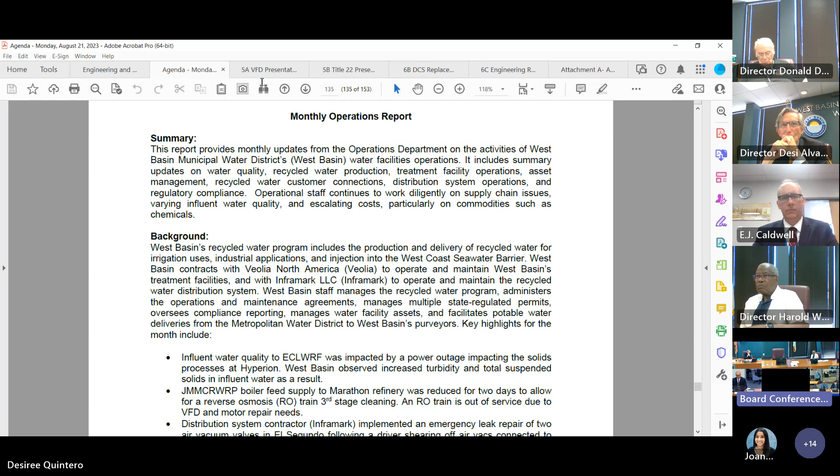And this actually plays into the conversation we're having. We have had a few of these accidents where a motor vehicle has sheared some of our air vacs that caused some pretty big issues for us. There are claims that are going out for that. But it showed not only the response time, but interestingly, getting emergency vendors on hand. I think this is something we have in the entire industry.

As a lot of you know, I participate a lot with AWWA. I like to survey a lot of my colleagues. What are you doing? How are you doing this? And just this last Wednesday was the water education seminar, where nearly 750 operations folks got together for contact hours, and it's education and workforce development. And when we asked what kind of courses do you need, almost all, whether they were municipal or vendors, said that what they need right now are courses to help get new people trained up.

There's still musical chairs. There's still a lot of people out there where they've got some great talent, but they need to get them up to speed. But it was interesting because the issues we're having with bidding, I have some emails from some folks. It's happening all over, for sure, the people we talked to in California and even Nevada, just some moving pieces. So I did want to let our board and the public know that in operations, we get literally, if not daily, weekly calls and emails from vendors.

And because I think every college student should have to be a server at a restaurant and do telemarketing for a few months to appreciate being kind, we make sure that even if they call to say we'd like you to try our toilet paper, or we have giant water trucks and tractors, even if it's a service that we don't need, we always kindly direct them to our procurement system. We have Joanna and Colette that will then send an email letting them know, even if it's not us, we might do it in the future. We have other avenues where we get back to them.

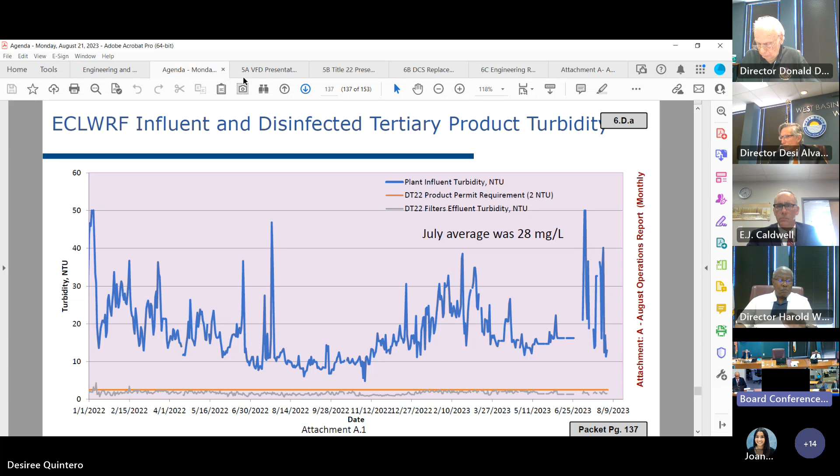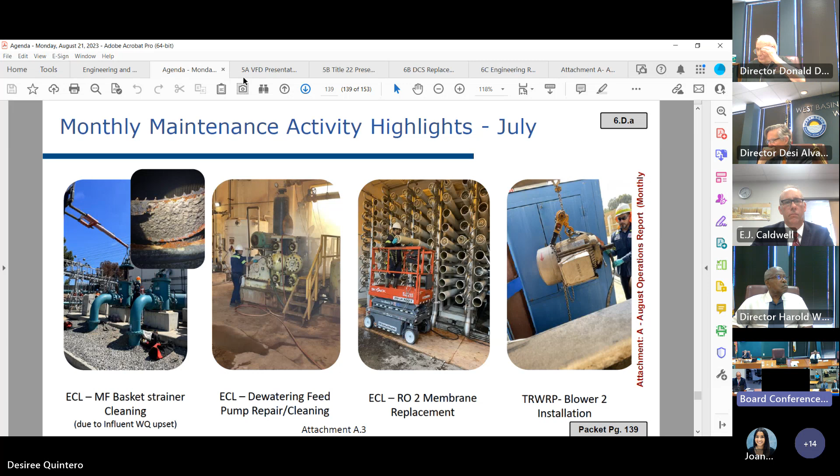Our CMS system is really growing. But if we have these upsets, our regular PMs might need to turn into a CM because we need to take care of that. So we have some photos out here of just all the daily activities, whether they're response or things that have been scheduled. Next slide, please.

As we move into recycled water production, we just started the new fiscal year, and that's why we show you what we have budgeted. A little behind as a result of shutting down the barrier and a few things during the last small upset. That's what we conserve first, but we're back on track, hopefully, and we'll see that in the next month. Next slide, please.

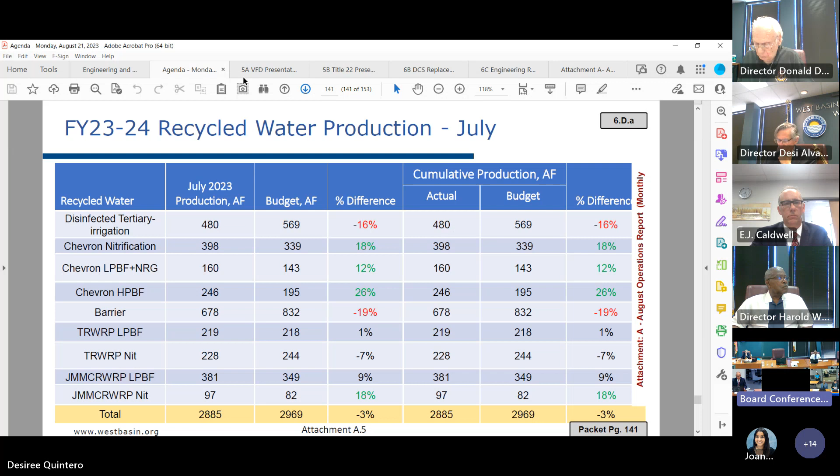We have the same here. You can see anything that's over a 10% difference. We have the green, red, we need to improve on that. And you can see sort of a result of anytime we have the upsets, and as we continue to recover our system, some of those inputs are down, and that is for this past month, July. Next slide, please.

Here we have comparison to last year. So we already can get a look, again, we're 1 month into this, but it's cumulative for the year of where we stand on our recycled water sales compared to last year.

Next slide. We move into our environmental compliance activities. Standard reporting, there has been a lot of activity from regulators. Compliance team doing well, because I think a lot of people during COVID weren't doing inspections, so we're getting a lot of those now. We had the lime incident. AQMD responded, gave us a notice of correction. We were able to get together strong teams and send in that notice, and there were no violations as a result of that.

Next slide, please. This gets into our potable water customer service. We did the regular sampling. Because of some of the influent water from MWD right now, we're working with some of our purveyors on some of the nitrite issues going on, all that successful, setting up meetings. And we'll also start working on UCMR. We'll see that in the future here as well. Next slide, please.

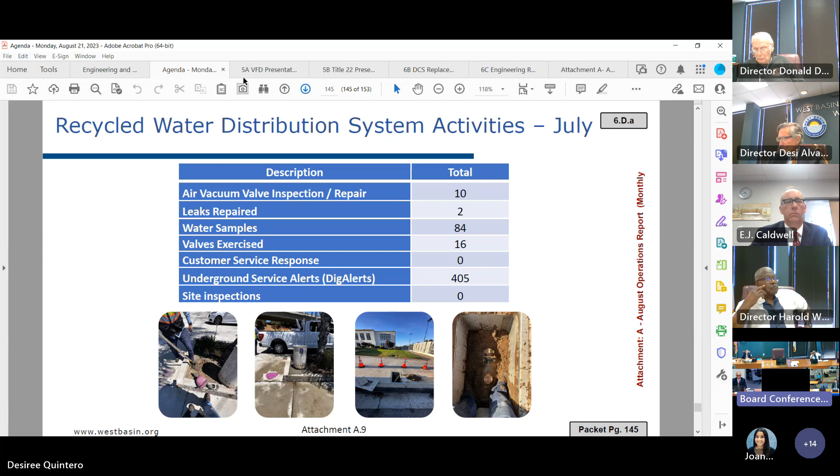Again, when we get into the distribution system, you can see some of the regular activities that are going on there. This is another example of where there's a little bit of musical chairs in our industry going on. Infomark has been great, but some of their leadership has changed, moving around. We're actually going to be meeting with them, I think, in another week. But their ground crew is here and trained and still getting the work we need done, with Frank and the distribution team managing that. Next slide.

Another thing we're noticing is to get someone to respond to emergency. This is very different than when I started in Potable years ago, maybe because of the situation with staffing, a lot of the normal usual suspects that we could call out to respond for an emergency repair that has heavy equipment, they're busy with their regular folks, and they're looking more for long-term contracts. They're gonna go first to those they have a contract with.

So we're looking at other agencies, clever ideas. Is there a way to sort of have some regular type of function, sort of like we have done with some of our other contracts, to make sure there's no supply issues. Next slide, please. Here we have some of our regular projects. We could probably roll through these. There's some great pictures of us connecting.

Something to make note of, we often see these and we think they're brand new connections. Some of them are. But the way our permits are, we hold the permit for recycled water, even if the retailers distribute that water. We are required by our permit to do inspections, to make sure that we hear and know who the recycled water supervisor is for each site.

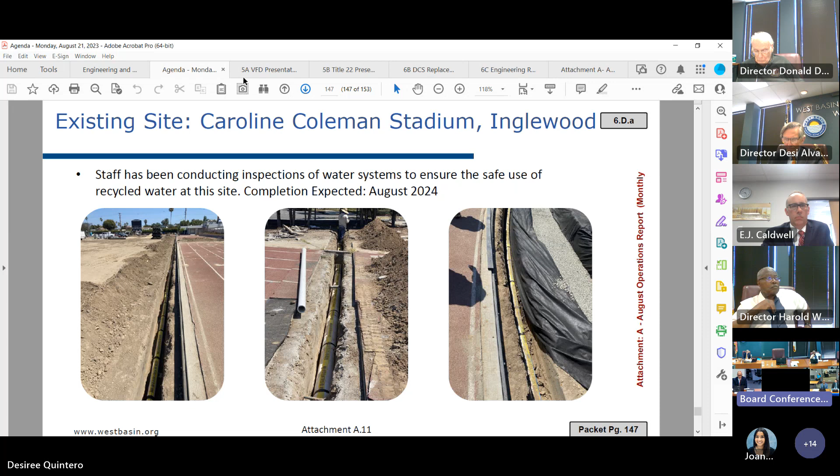I mean, usually it's expanding the system, but anything done on site, which is not, again, I come from Potable in the past, anything on the other side of the meter was up to everyone else. But per our recycled water permits, we do have to ensure that and work with the county that what happens on the other side of the meter is done per our permit requirements. And we're going to ramp back up on our training for all the recycled water supervisors and move forward with that. Next slide, please.

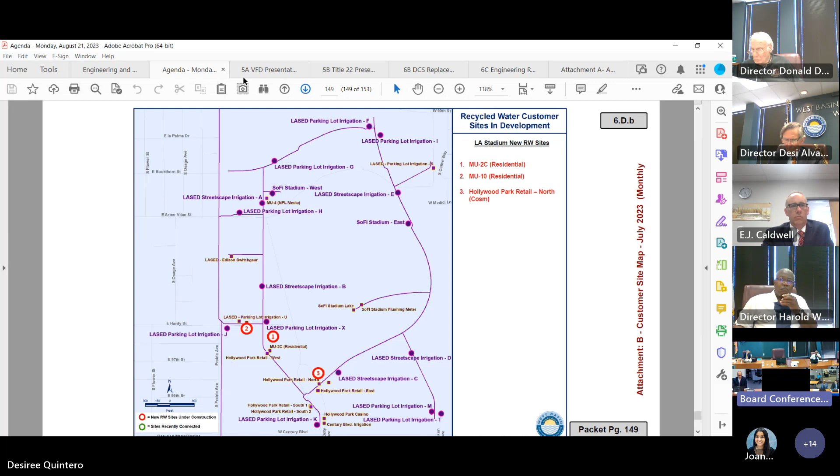I think we have some more photos of the different locations, some of these projects we mentioned. Those are all available in your packet. Any questions on those? And again, the list we have here, I believe that's it for the presentation. Are there any questions? Any questions, Director Lynn? No, thank you. Director Gray?

Under recycled water sales, we're projecting on average about 3,000 acre feet a month. We did try to average it per month, yes. When we forecast, we do try to anticipate seasonal. So that is an average, but when you look at the projections and you wonder why it goes up and down, we try to adjust it for seasonality. But on average, 36,000 acre feet seems like that's the goal. We may or may not get there. We haven't been getting there.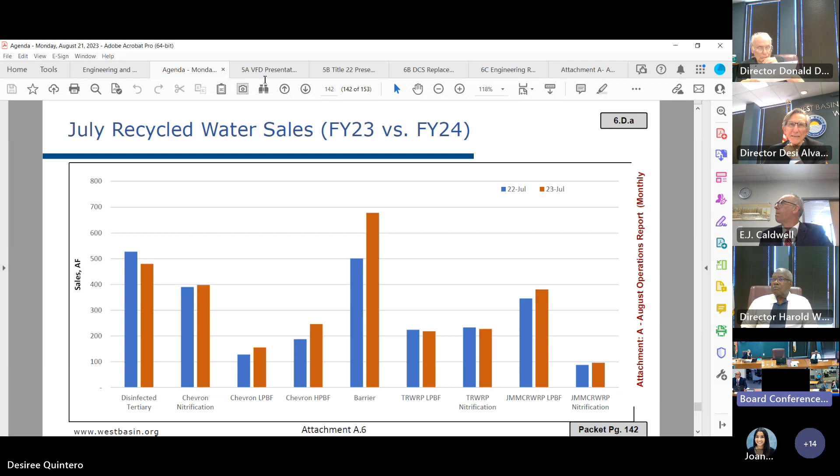Yeah. Okay, but that's really if we're operating 100%, correct. We're aiming about 36,000 acre feet a year. Yes. You look at the graph over there, Director Alvarez, you're absolutely right. 3,000 is around the range for the summer/fall months, about 3,000 acre feet per month. But it does dip in winter months. Plus or minus, that's what our delivery goals are, and that's really what our capacity would ideally be if we're operating at what we intend and where our demand is. It's about 36,000 acre feet. Okay. It's always good to know where we're at.

One of the items I would like to see in this report, I know we covered the recycled water sales, potable water sales. If we could include that, also very important. And I'd like to see the monthly variations in potable water sales. Mr. Chairman, we can easily add that. It is important to note that we do include that in our Finance and Administrative Committee, so you'll see that in the monthly packet there, but we could add potable here. I understand that, we'd like to have it here, so we look at recycling and potable water as part of operations.

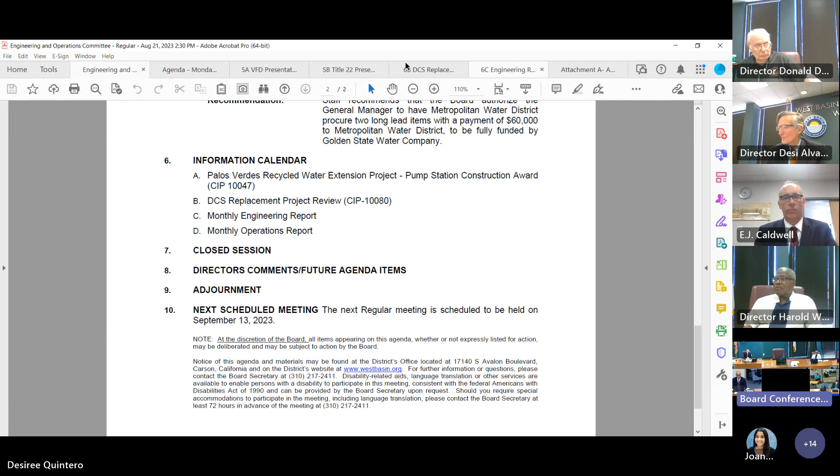Yeah, this will be really quick, Chairman. Again, thank you, EJ, thank you, Director Alvarez, and the rest of the board. Please turn to page 110 in your packet. I'm going to give you a quick look ahead at what is expected in September. We plan to come back, just like John Venner previously mentioned, with the DCS system, CIP 10080.

We expect 2 informational items, one being the CIP assumptions for the cost of service study, and also the Title 22 converted booster pump station closeout, CIP project 170. And now I'd like to introduce Veronica to give an update on the PV pipeline.

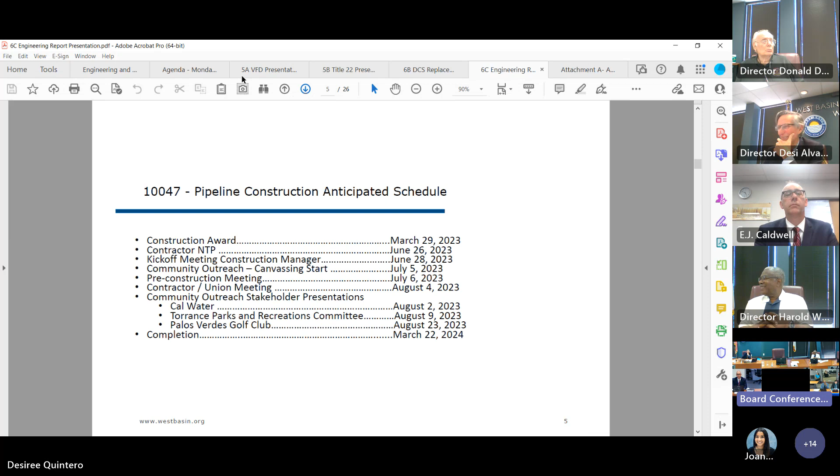Yes, so this is the second component. Oh, we got there already. No, I'm sorry. No, there's another component. There's also a pipeline construction schedule. You follow me to package page number 112. There is a schedule that has been presented for the board members to look at the items that had occurred.

Our notice to proceed to the contractor was done on June 26th, and since then we have had several meetings that include the construction kickoff meeting, community outreach canvassing, as well as meeting with the PLA. And in a slide that comes next, you will see a summary of who attended those meetings. But another component here too is that we have been doing community outreach meetings to stakeholders.

One of them was to Cal Water, who is our partner on the funding of this, and also Torrance Parks and Recreations Committee. This meeting was done at City of Torrance on August 9th, and it was attended by public as well as commission members from Parks and Recs, and West Basin staff attended was from PIE, from Rakau Communications and Engineering. Feedback was positive, a couple of comments that we received, but the meeting went pretty well.

We are also having a meeting this upcoming Wednesday at the Palos Verdes Golf Club to basically discuss the outreach program that will be implemented along the way. Right now, the pipeline is expected to be completed on March 22nd of next year. On the next slide, you can see a similar kind of format to the JMM project, in which you see the schedule and the contract duration, as well as the construction costs. So far so good, no change orders, so we're still on the good greens.

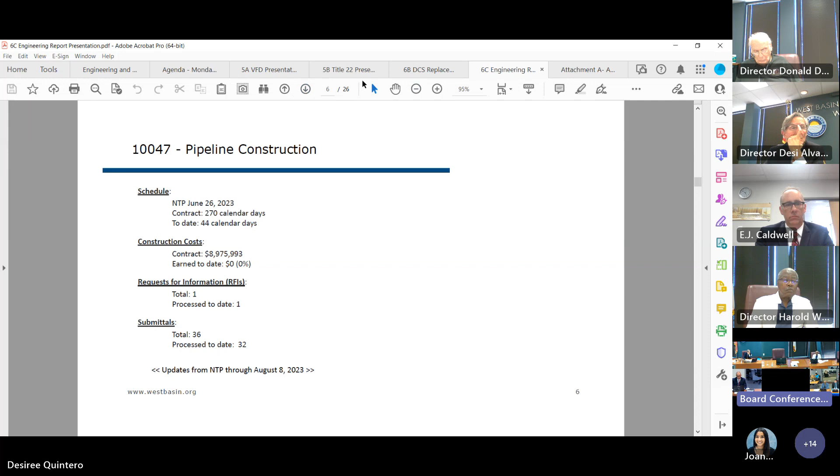Request for information, we received one which was very minor, just for information in regards to record drawings, and then the submittals. We are basically keeping up as they come in. We're trying to respond as quickly as we can. Again, these updates were cut off through August 8, 2023 for purposes of submitting the board memo. Next slide, please.

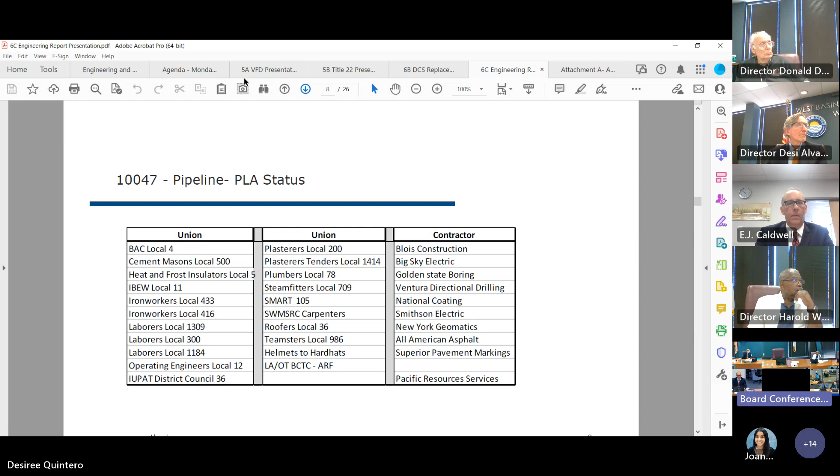So on this one, again, both pipeline and pump station do have a component including the PLA. And this is just basically a summary of the requirements of the PLA. It follows the format of the JMM. It's basically the same requirements. And we had our meeting with unions on the next page. And you can see all the members of different unions and contractors that attended the meeting, which was a pretty good response.

This meeting took approximately 1 hour, and basically the prime contractor was able to get the union workers from each, not jurisdiction, but basically task or specialty for that work. So once we start doing the construction, we're going to start seeing the numbers of how many of these workers are at risk, or which ones are local, and you'll start seeing the development of that spreadsheet being presented for your use and information.

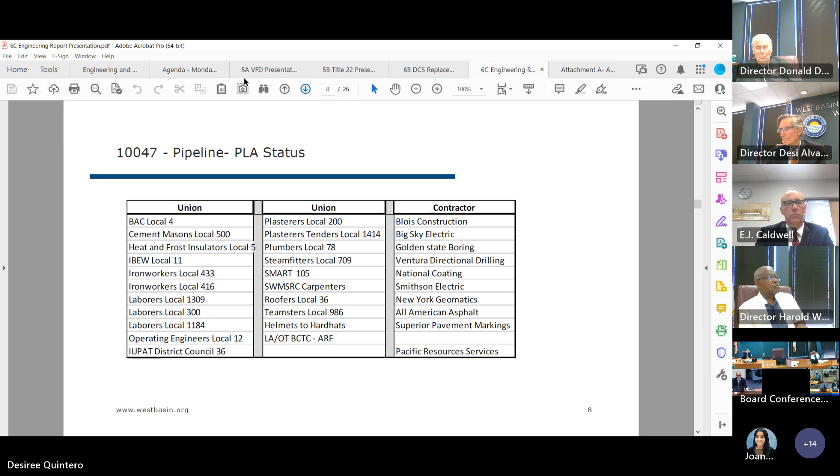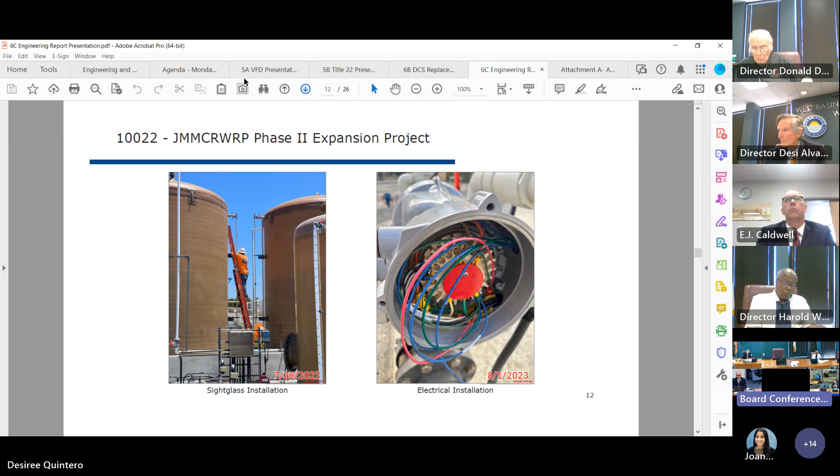Thank you, Veronica. Good afternoon, Chairman Alvarez, members of the committee and board. I'll start on page 118 to highlight the JMM CRWRP Phase 2 expansion project. Commissioning is still ongoing on site with a lot of work on the fine tuning of miscellaneous items around site. The first photo shows installation of the sight glasses on our FRP storage tanks. On the right hand side, you can see electrical terminations. I think this is actually a flow control valve. Next slide, please.

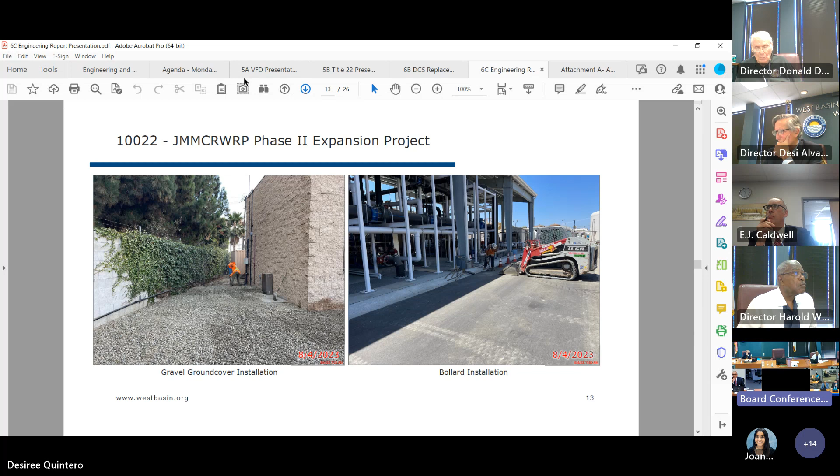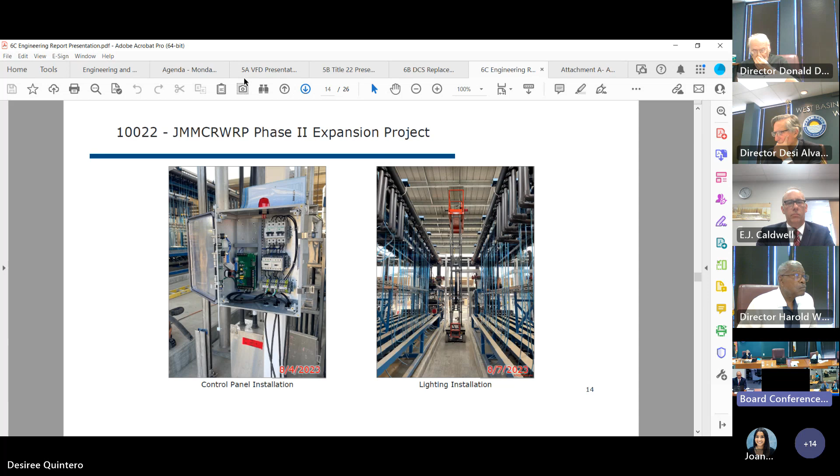On the left-hand side, you can see the installation of one of the control panels, and on the right-hand side is the installation of the lighting within the CMF canopy. You can also see this is as if you were standing in between two of the microfiltration racks, getting ready to receive the modules in the coming weeks.

I'll quickly highlight the status of the project. Our contractual completion date for the contractor was June 30th. We are a little beyond that now, and we continue to have discussions with the contractor and work through the responsibility for those delays. In terms of construction costs, the construction contract is currently sitting at right around $22 million. To date, we've paid just north of $20 million, so about $2 million left to be earned by the contractor.

In terms of RFIs, there are a lot ongoing on the project as we work through the commissioning and startup of individual pieces of equipment. There's been 320 to date, and we've processed 316. On the submittal side, it's starting to slow down, but we've received 368 and have processed 365.

Here is the standing update on the highlight of the PLA status. The numbers look good overall. We're at 33.6 for our approved local number, 7.3 for our at-risk worker percentages, and 23% of the work hours provided on site are being done by apprentices, which is great to see.

Here's a breakdown of those numbers by company and division. Division 1 currently leads the way with the most hours related to the PLA, and our general contractor carrying the bulk of those hours being JR Filanc Construction.

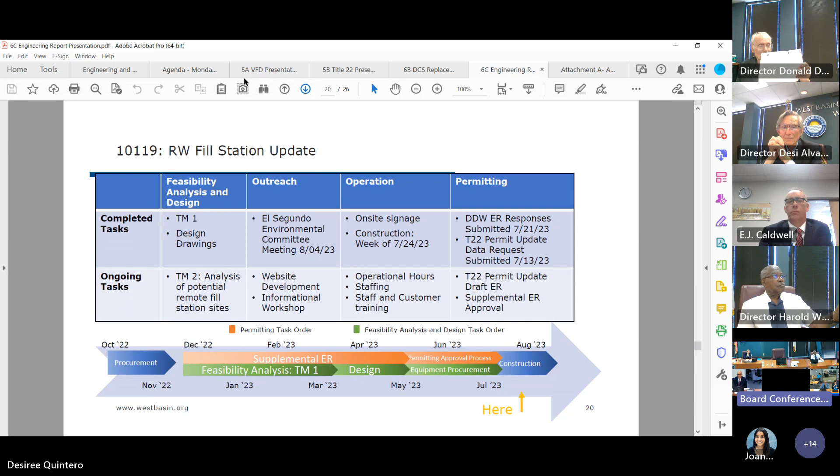So I will provide a brief project update on the recycled water fill station. In this past month, we had one of our public information specialists attend an El Segundo Environmental Committee meeting to publicize the fill station and start to advertise to the community.

We are still waiting on DDW for their approval. In the meantime, we have been able to procure all of the on-site signage and print all the customer materials. We were also able to construct the fill station, and that happened on July 25th. And we were able to perform some flow rate tests just to ensure it's a steady flow.

We are also working with our own staff to determine and finalize operational hours, the staffing schedule, and the website. For that website, we intend to have all of the information that our customers and customer retailers will need, so we do not see a need to host an informational workshop. Also, as I said before, we received comments from the Division of Drinking Water in early July, and we provided responses on July 21st. I have touched base and communicated with them just to ensure that we are receiving a conditional approval letter, and that should be coming soon.

Once we are able to obtain that letter, we will work with our staff and public information to schedule an opening event. In the meantime, we are also working with Woodard and Curran to update our Title 22 permit update for our draft engineering reports.

If you follow me to the next page, you will see some images from that construction. It's a very simple setup. On the far left, you'll see the quick coupler valve assembly, which is connected to an existing quick coupler connection within our already existing irrigation system.